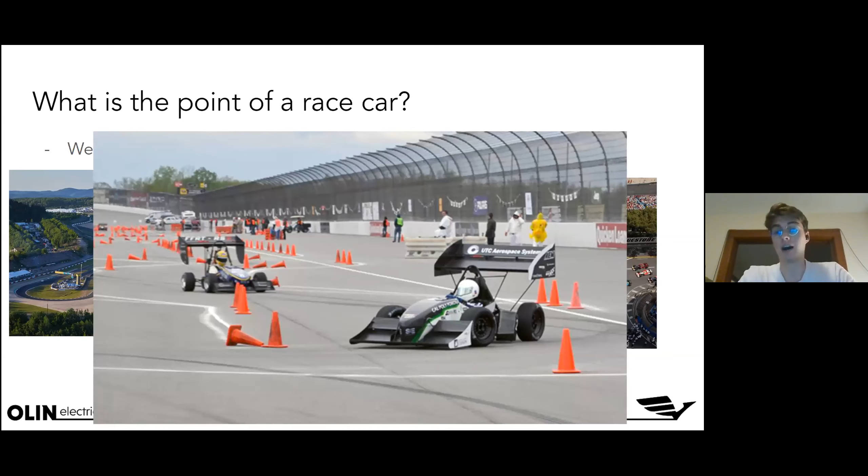And this is especially important for SAE teams because a majority of the points that we can get at competition are from the dynamic driving events. And all of those dynamic events are scored based on your time. So they're all time-based. So what we can talk about more generally is that, yes, we want to go around a track as fast as possible, but really what that means is we want to cover a certain amount of distance in the shortest amount of time. And this is fundamentally the problem that we're trying to solve.

And so the first approach you might have to this is you might say something like what I was just saying. Well, what does that mean? How do we do that? We want to go as fast as possible. But speed and going as fast as possible aren't necessarily the right way to look at this. Top speed, or going as fast as possible as a problem, is really only true if we are measuring the top speed. What we actually want to do is we want to have the highest average speed. So out of the total track distance, we want to cover that distance in the shortest amount of time.

And to accomplish this, what we want to do, and I'm going to put this sentence on the board, and we're going to spend the rest of this presentation dissecting the sentence, is we want to be accelerating as much as possible in the most correct direction at all times.

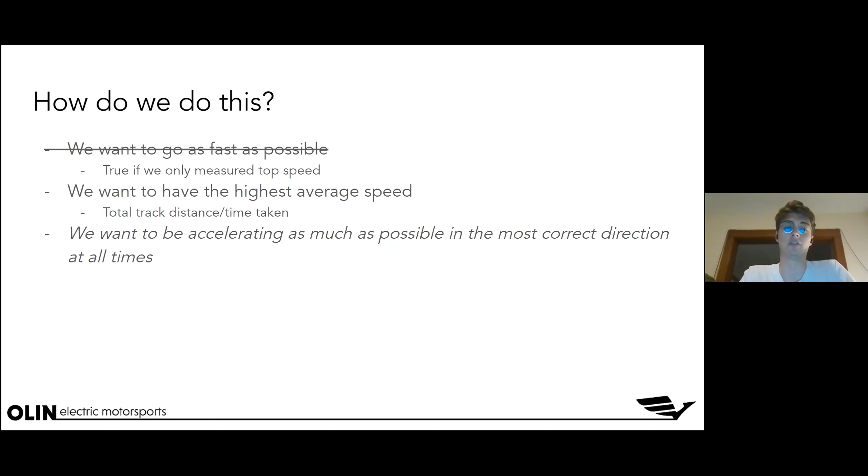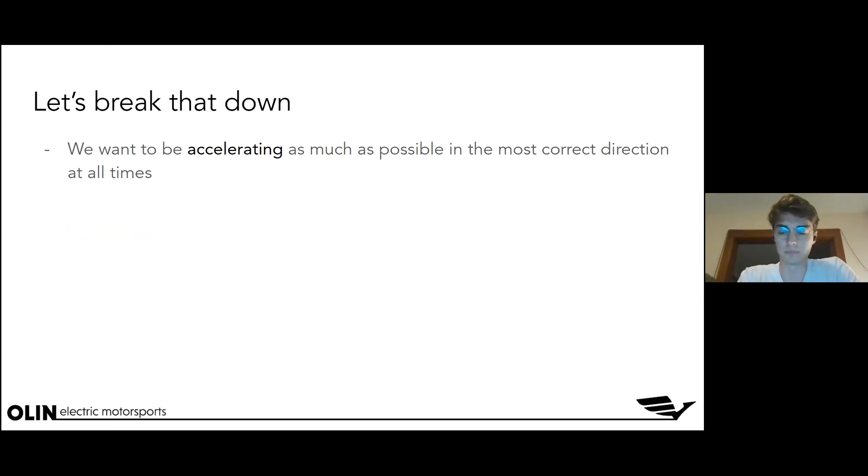So let's break that down a little bit. First, let's talk about acceleration. And why do we actually care about acceleration? So I'm going to give a quick example here. Imagine that we're in our car and we're on some street, we're starting at point A and we're starting from rest, so we're not moving, and we want to go to point B, which is some distance away.

Now, if you were driving your normal car that you drive at home or whatever, the way that you would go about this would look something like this. You'd be starting at rest at point A. You would start accelerating, you press the gas. You'd get up to some speed, probably the speed limit or some speed that you felt comfortable with. You would maintain that constant speed for some amount of time.

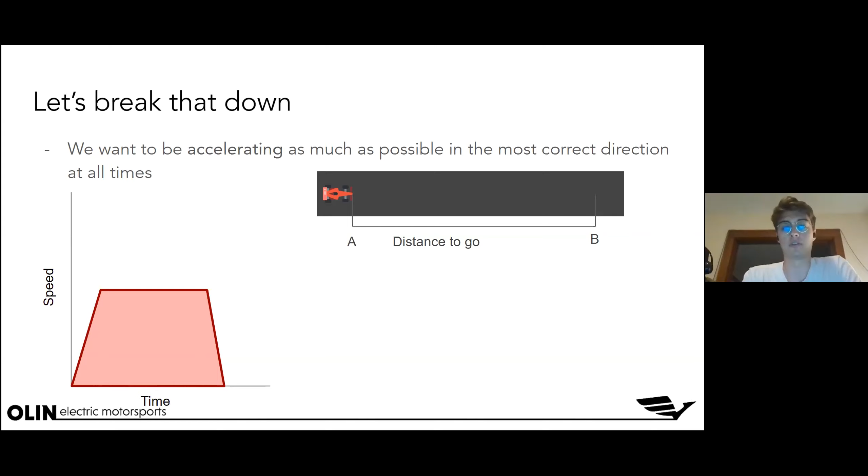And then once you got close to point B, maybe somewhere around here, you would hit the brakes, slow down, decelerate to a stop, and stop at point B. Now, the plot that we're looking at here on the left, sorry, it's kind of covered up, is a speed versus time plot. So speed on the y-axis, time on the x-axis. And an important rule: if we look at the area under the curve, that is representative of the amount of distance that we have traveled.

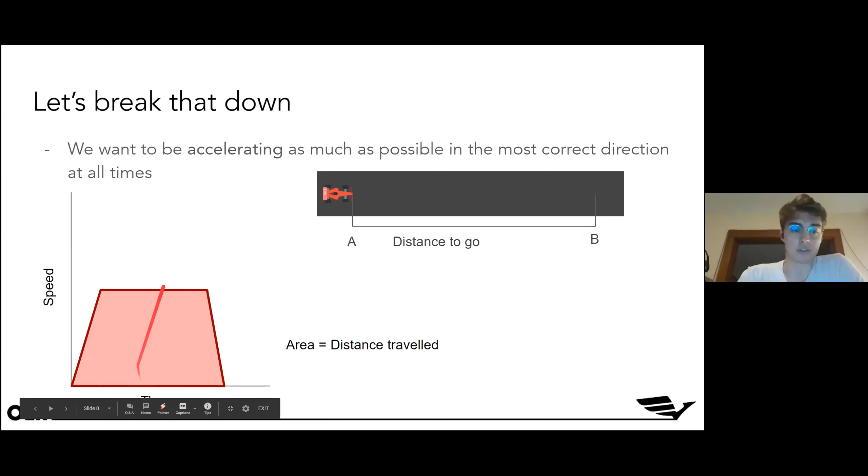So now let's compare what we just did as normal passenger car drivers to what a race car driver might do. A race car driver would do something like this. They'd be starting at rest at point A. They would accelerate, and they would not stop accelerating until they got to the last possible point that they could start braking. They'd slam on the brakes, and they would decelerate all the way back down to rest. Now, again, the area under this curve is the total amount of distance that we've traveled.

And the important thing to take away here is that the two areas under these two curves are equal to one another. But you'll notice that the race car driver accomplished this distance in far less time than us in a normal passenger car. And so the biggest takeaway here is that when you look at a speed versus time plot for a race car, you will never see a flat line.

So what I'm going to show you on the next slide is an example of what a speed versus time plot might look like for a race car driver going around a whole track. You'll see the same thing I was talking about here. On this graph, there are essentially no flat lines. You'll notice that the speed is constantly changing, meaning the driver is constantly accelerating. And that's because, as we just saw, when you are maximizing your accelerations, you will go around the track in less time. That is, we will be increasing our average speed over the course of the track.

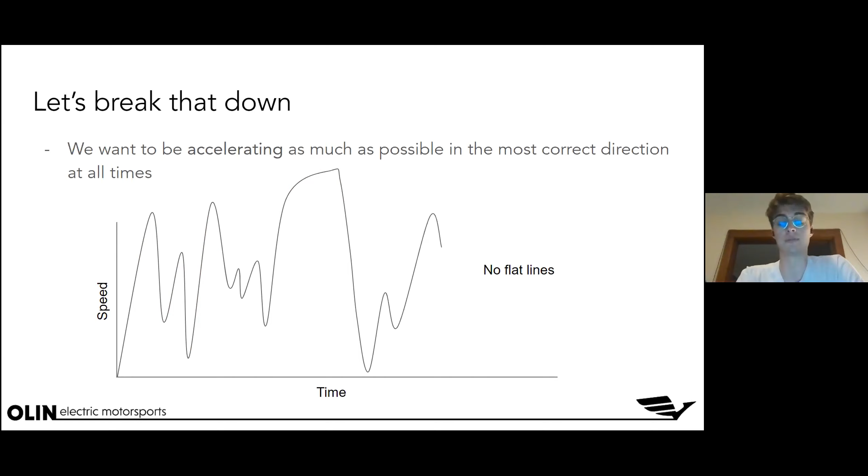The only part that you see begin to flatten out is when we're actually approaching the top speed of the vehicle. So the only time you'll ever see the driver going at anything near constant speed is when they're going as fast as the car can possibly go. And now on the next slide, I'm going to show you a real speed versus time graph coming from two different F1 drivers.

So that'll be our first section to pause for questions. Feel free to put anything in the chat, or if you have something that you feel like you can't type out, feel free just to speak up. I'll wait maybe 30 seconds for people to add some things and then keep going.

I have a quick question. When we're designing the gear ratio, and I guess the car as a whole, how are we balancing for fastest acceleration versus highest top speed?

That's a very good point. So, as with anything, it's kind of a balance. What you really want to look at is the kind of track that we're on and the kind of racing that we're going to be doing. So for a FSAE track, we're essentially never going to reach our top speed. The way that the track is laid out has very limited straightaways and you're almost always turning.

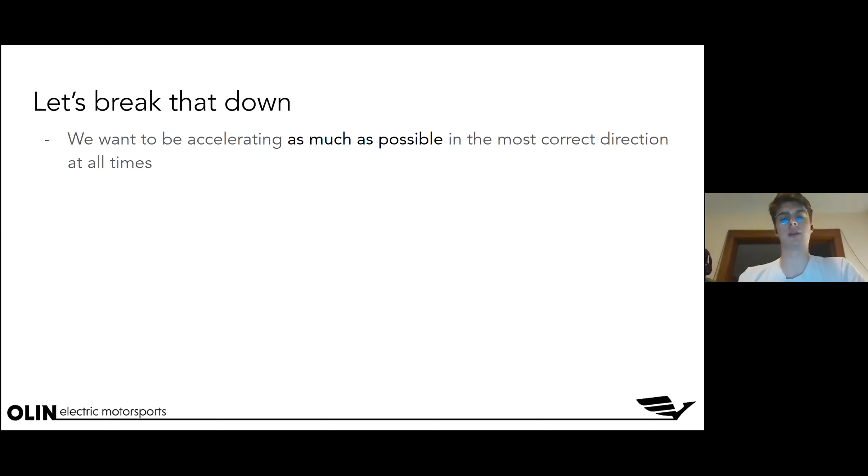Okay. So now let's get to the next part of this sentence, which is this "as much as possible" piece. What does it mean to be accelerating as much as we possibly can? And really the question we need to ask here is, what is limiting us from accelerating as much as possible? And the answer is that basically any vehicle system can theoretically limit how much acceleration is occurring.

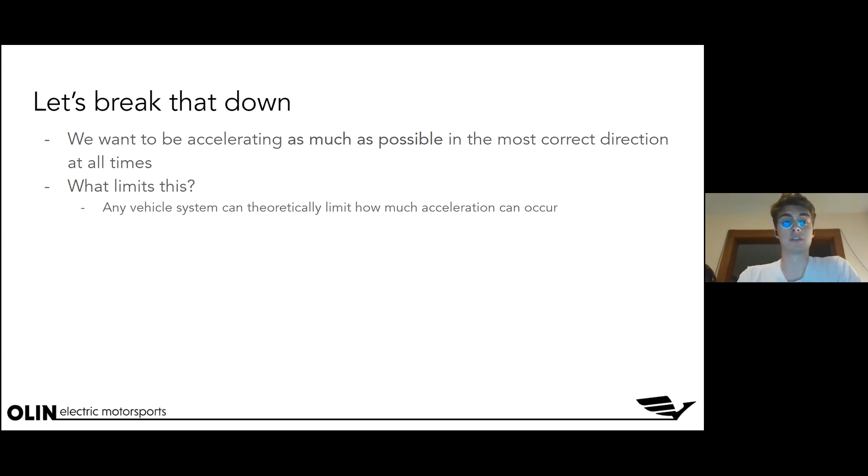So you can imagine if we had a really, really weak motor in our car, we would not be able to accelerate forward very quickly. If our brakes were very weak, we would not be able to brake very quickly. If our accumulator was a couple AA batteries, we'd probably not be able to output very much power and would not go very fast. So any vehicle system can always impact how much acceleration can occur.

But ultimately, every acceleration is limited by our tires and how much force our tires can apply to the road. Because the only way for a vehicle to move is for us to have a reaction force from the road that gets fed through our tires and into our chassis.

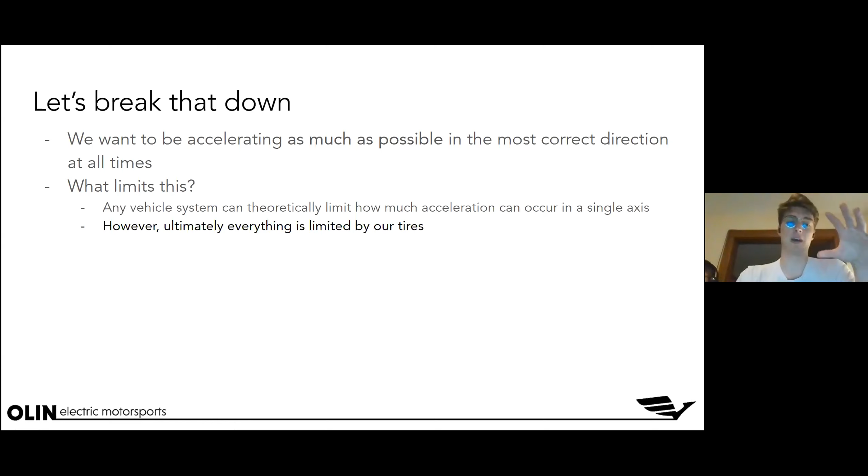You can imagine a situation in which we have the most decked out engine system ever. So imagine we had our car with the Ferrari Formula One engine in it. This thing can output a crazy amount of horsepower. But if our tires were made out of ice, we would not be able to accelerate very quickly. We would just be spinning our wheels. We'd be getting no traction and no forward acceleration.

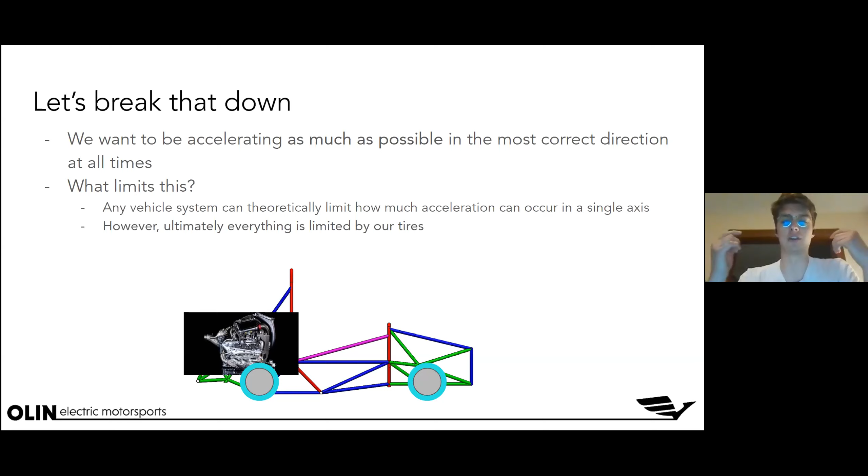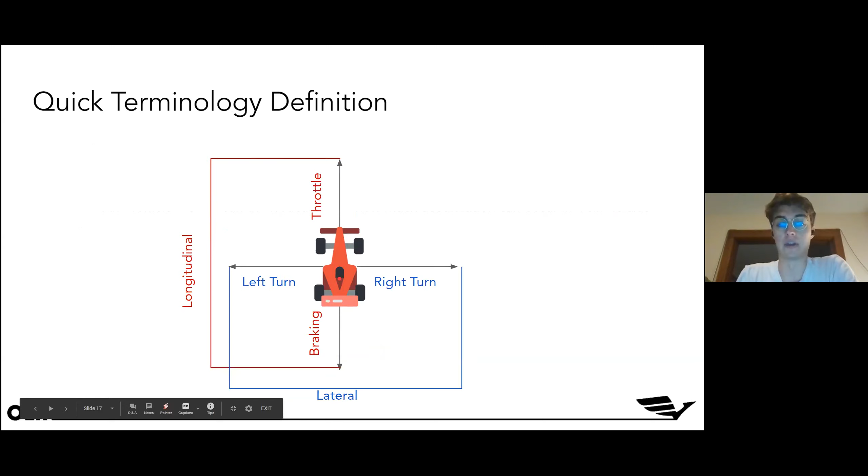So I'm going to pause here for a quick terminology definition, which is just going to make things a little bit easier to explain. I'm going to define two axes of the vehicle. The first one is the longitudinal axis, which defines basically the throttle, so forward acceleration and braking, moving forwards and backwards relative to the car. And then lateral accelerations, which are our left turns and our right turns. So longitudinal means forward and backwards, lateral means left and right.

Okay. So now let's go back to this idea of what's limiting us. It might be useful for us as a team to approach this problem by making a plot that represents our car's theoretical maximum acceleration. So let's build this plot up from scratch. Let's look at our two axes here. The first one is longitudinal acceleration, so how much we can accelerate in the forward and back direction. And the units of this graph are going to be in G's, the gravitational constant for acceleration, which is about 10 meters per second squared.

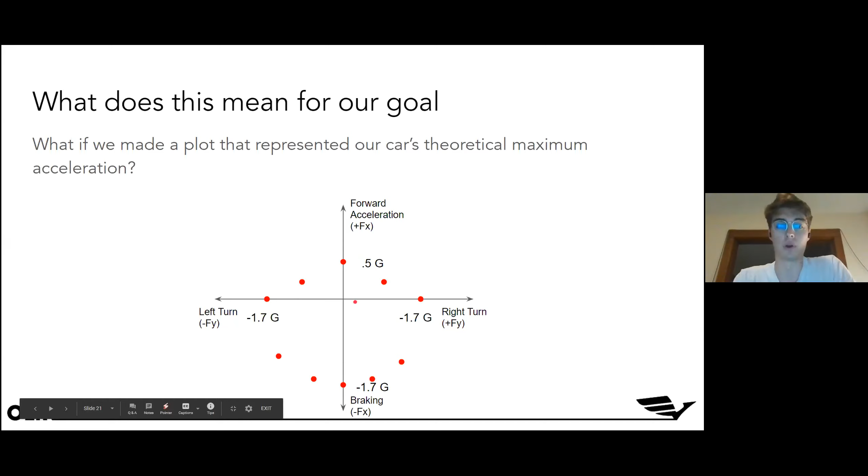It might be useful for us now to start filling in some points in between on this graph. So maybe we have a point where we're both turning right and braking, a point where we're turning right and accelerating, a point where we're turning left and accelerating, and so on and so forth. And you can start to imagine that we might want to make something that basically covers our theoretical maximum acceleration in every direction. And that is what we call a GG diagram.

Sorry, I kind of messed this graphic up.

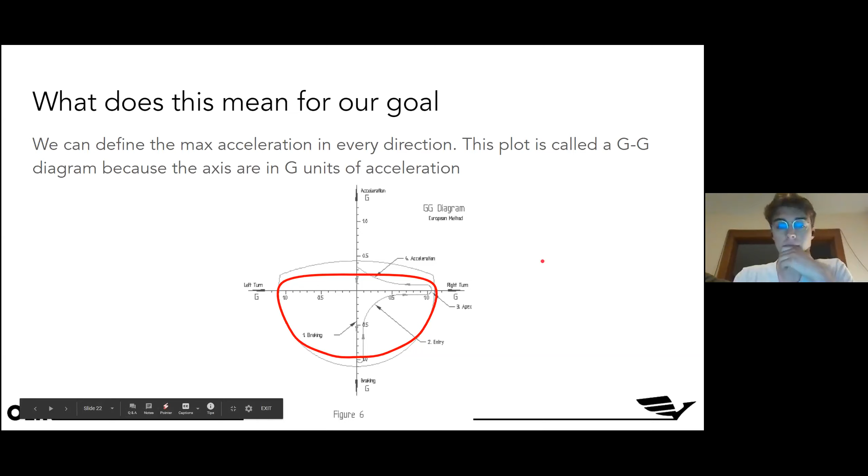So now you can imagine, in this outer region, this GG diagram is limited specifically by our tires. So this makes the assumption that basically every vehicle system can output substantially more force than our tires can output. But if we look at this other example, this little red line, this is what a GG diagram might look like if our vehicle was system limited.

Say our transmission could not output very well, this would limit our acceleration in the forward direction. Or our brakes were really bad, this might limit our deceleration as we're braking. And so basically, ultimately, the point here is that we always want to be tire limited and not system limited.

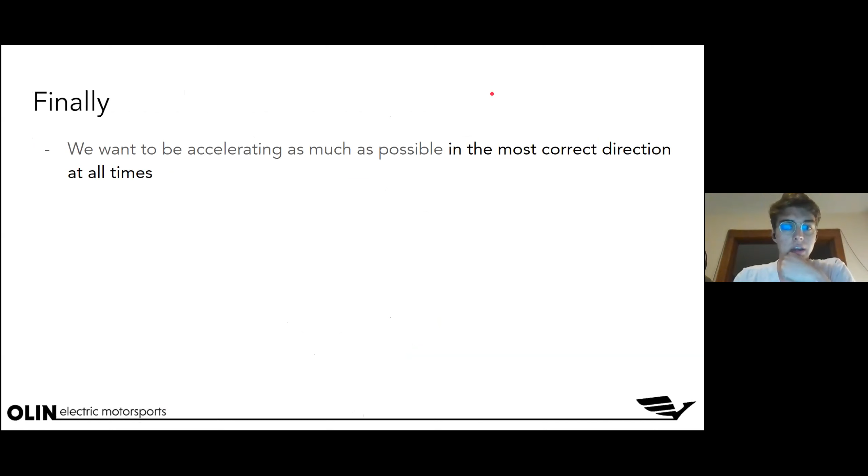Okay. I'm going to pause here again so that we can answer some questions.

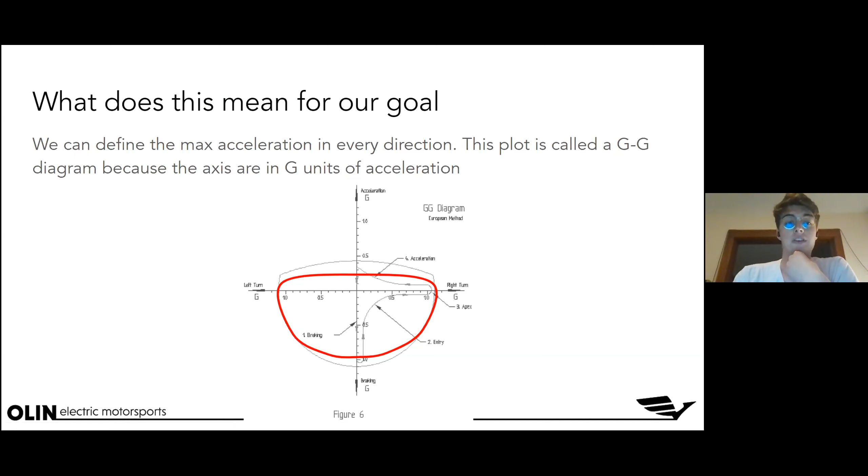How is the GG diagram made or measured? So that's a very good question. There are a lot of different experimental tests that we might want to run that would help us create this diagram. So there's two points. First is through system modeling. So having an understanding of exactly how much force our tires can output, how much power our accumulator can output, how much power our transmission can output, how much power our brake can transmit. And so we can build this diagram through understanding each of our different system parameters. And then the other half is through testing.

So we can always find ways to put an accelerometer on our car and test in very isolated ways to plot out the points that we were making on the diagram, like I was doing earlier, looking at a maximum acceleration case, a maximum braking case, a maximum left and right turn case.

However, if we make the assumption that we are always tire limited and not system limited, we subscribe to a consortium of testing that gives us information for how much total force our tires can generate. And so then the radius of this curve is basically defined exactly from that maximum amount of force.

Okay, we have another question. Is there ever a scenario where the max acceleration is symmetrical vertically? Yes, there is a scenario in that.

So if you can imagine that we had all 4 wheels being driven, so either our power was transmitted to all 4 wheels, or some teams do a thing where they have what are called hub motors, where there's a motor actually mounted to each individual wheel, such that each wheel was being driven and we were getting the benefit of all 4 tires. And then still assuming that those motors were always strong enough to provide more force than our tires could provide, then this graph would look like just a complete circle and not sort of that tapered off circle.

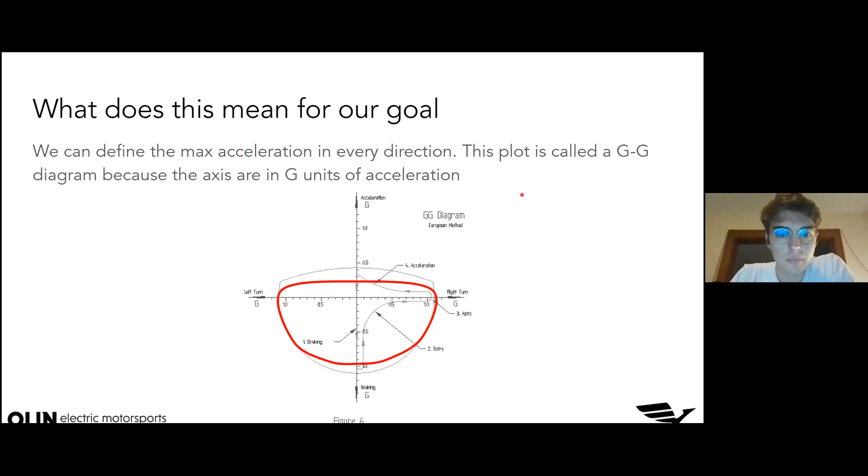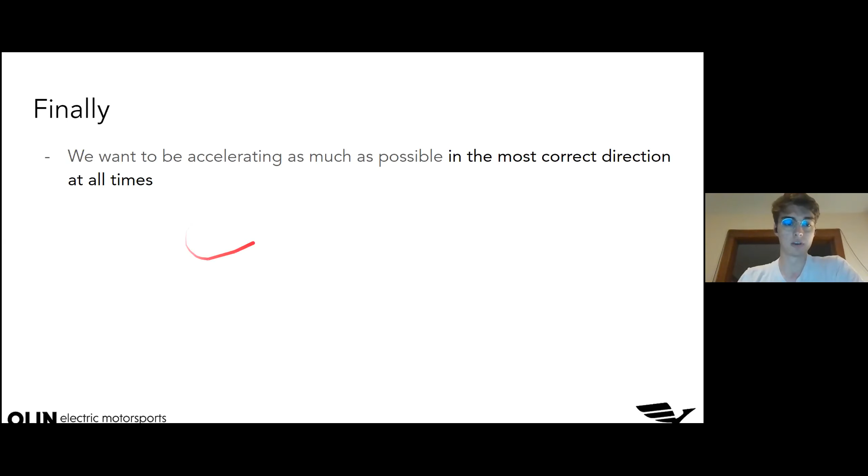So now let's get to this last piece. What does it mean to be accelerating as much as possible in the most correct direction at all times? As I was just saying, we see a lot of different cases and a lot of different acceleration requirements throughout our race. You can imagine a straightaway where we would want all of our acceleration to be in the forward throttling direction. Or you can imagine a higher radius turn where we still want to be accelerating forward, but we need some amount of lateral acceleration to make that turn.

You can also imagine that we might be entering a really tight hairpin turn at a high speed. So we want to decelerate as much as we possibly could going into that corner, but then have a little bit of lateral acceleration so that we can actually begin to enter that corner. Once we're in the corner itself, we want a very high amount of lateral acceleration. But as we exit, we want to transfer into longitudinal acceleration forwards. So as we're going around a racetrack and experiencing all these different turns, we would want to be hitting all these different acceleration requirements. And so what does this mean for our overarching goal?

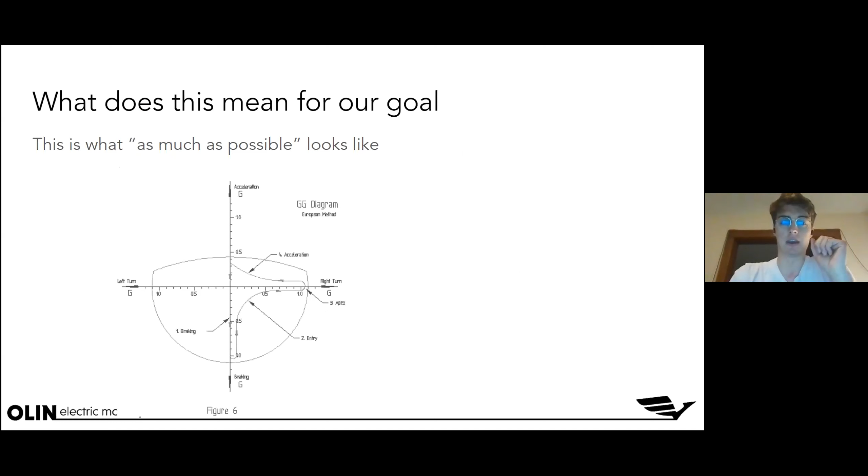And so the GG diagram is an extremely useful tool for a racing team, because it basically allows them to see how well the driver is handling the vehicle that they have and how well the driver is pushing the vehicle to its maximum performance limit.

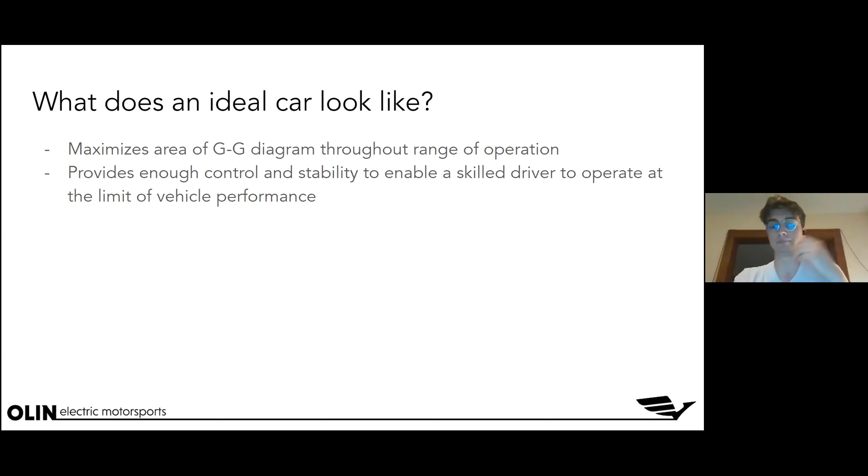You can imagine if you had an amazing car, but it was impossible to control. Say you could still accelerate a ton in all different directions. If it was impossible to control, a driver would never be able to push it to its limit. So I'll leave with a small quote here. Historically, every major innovation in race car design has resulted in extensions of these GG acceleration boundaries and an exploitation of them through improved control or driving technique.

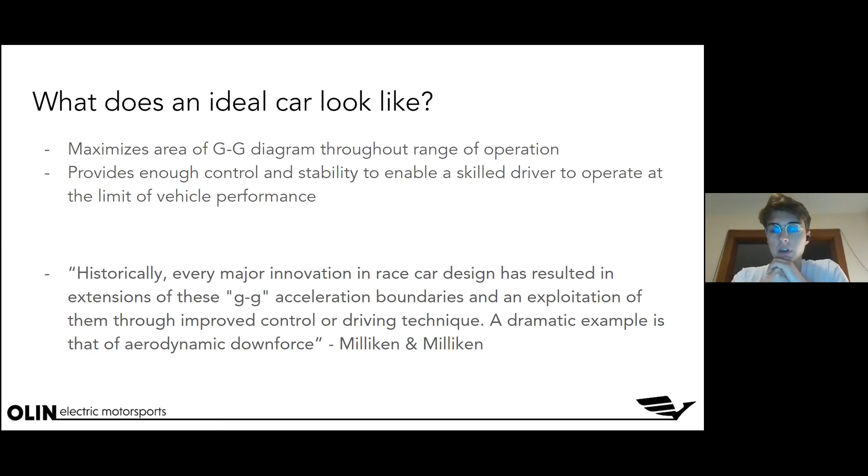So now I'll end with a little video here. You might want to mute your audio. I don't know how loud it's going to be. But this is one of Michigan's teams doing a lap around, I don't know where this lap is taken. But if you look on the left side here of the video, you'll see an actual live GG diagram plotted as the driver goes around the track.

Oh, geez. All right, here we go.

One quick note I will make here is that if you're a keen observer, you'll have noticed that all of the accelerations are actually the opposite of how I had plotted them on the diagram before. That's because the accelerometer is measuring inertial accelerations. And so it's measuring the reaction force that it's experiencing as opposed to how much the vehicle is accelerating in a global frame. And you can kind of intuit this. You can imagine if you turn a car really hard to the right, you'll get thrown to the left. The same thing is being measured by the accelerometer unit.

So hopefully that gives you a little mental picture of what the car is actually doing. I will pause for a quick look at the chat for some questions again. All right, from Lucky: what happens when you exceed the limit of the GG diagram, such as the driver did on the left side? That is a good question. So you'll notice here on this left-hand side, the driver has exceeded what we'd expect the maximum vehicle performance to be. There's a couple explanations for this. One is that, again, these are all system models, and not all the models are perfect.

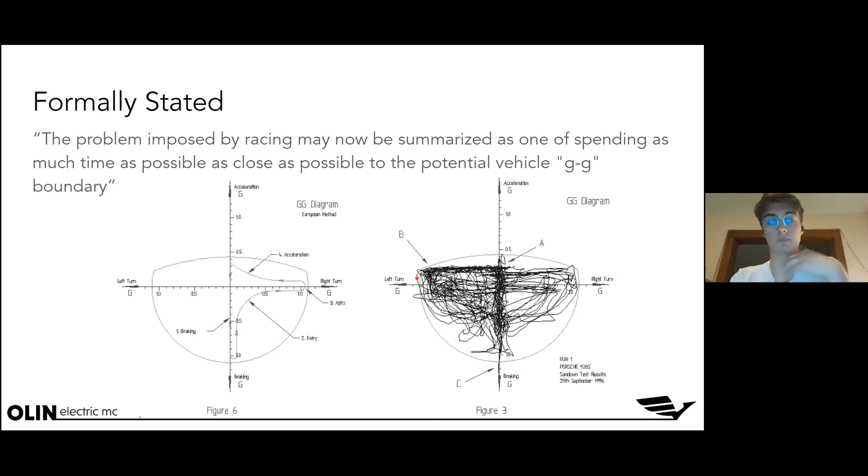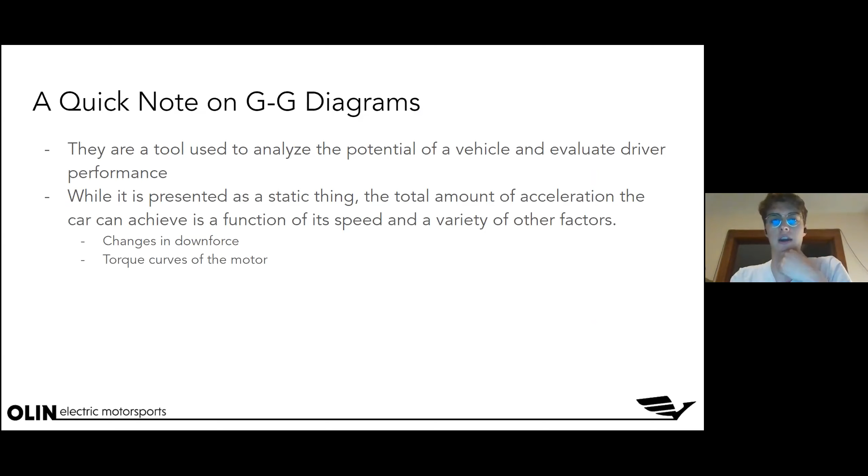Cool. And that actually takes us nicely into my final point, which is a quick note on the GG diagrams. So like I said, they're a really useful tool to analyze the potential of the vehicle and evaluate our driver's performance. But they are not an end-all be-all, and they are not a complete descriptor of the vehicle performance. And this is because a lot of things can change how well your tires are performing.

And so the GG diagram and its boundary is actually also a function of the speed that you're driving at. So if any of you watch F1 or know what aerodynamic downforce is, you'll know that the faster you go, the harder your vehicle gets pushed down into the ground, and that will change how much force your tires can generate. So sometimes we actually look at GG diagrams with a third axis as speed, and that creates this manifold or envelope that looks at how well your car performs over a range of speeds.

So it's definitely okay to look at it in a static case, especially for a team like us where we don't have as much of that aerodynamic downforce. And it's also useful to understand the average that your car will be operating at and understanding its maximum in that sense. But like I said, it's not an end-all be-all, and it's just another tool that we use to look at our vehicle's performance.

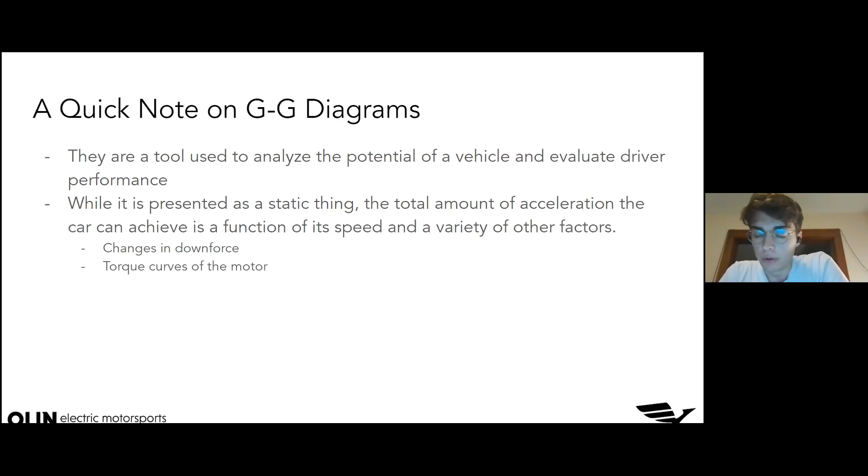From Lucky Jordan, who's the most boomer on the team? Lucky, to your point, I'd say it's you because you couldn't figure out how to use Zoom to get the poll working.

To Kay's point, how do we choose what tires to use? That's a very good question. So here's what we do. The honest answer for our team is that we basically look at one website, which is Hoosier, because they make tires that are specific to FSAE students. And we use that tire testing data that I was talking about before that we basically buy. And that tire testing data allows us to see how much force those tires can produce, at what speeds, and how much steering input it takes to get to those forces.

And so that's part of the decisions that the suspension and chassis team makes, along with some other high-level vehicle decisions, to decide which tire we want to use based on how much force it can produce and how often we expect to be in a situation where we can produce that much force with that tire. And so by looking at all this data, we narrow down to a tire that we think is most suited to the track our vehicle will be on, our vehicle's weight, our power requirements and things like that. And that's how we pick the tire.

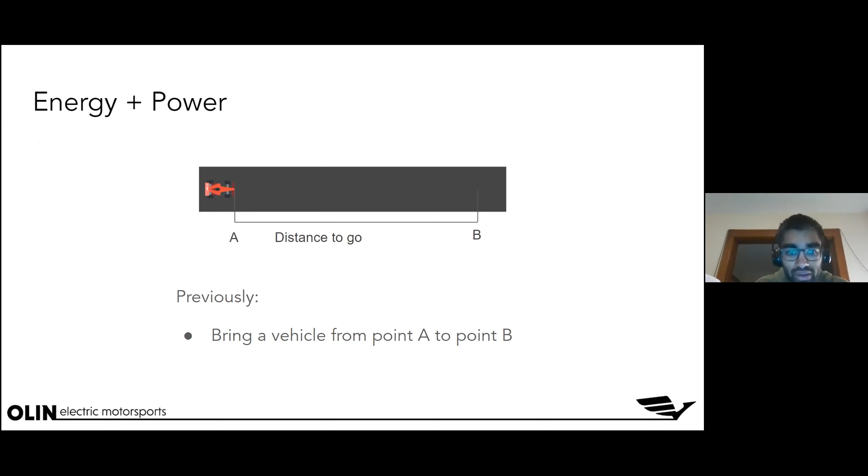Okay, so this is the graph that Nate brought us up with, point A to point B. And we started with two different methods of reaching that goal, each with a different amount of time and each with different amounts of acceleration. And Nate told us this mantra: we want to be accelerating as much as possible to achieve the shortest time.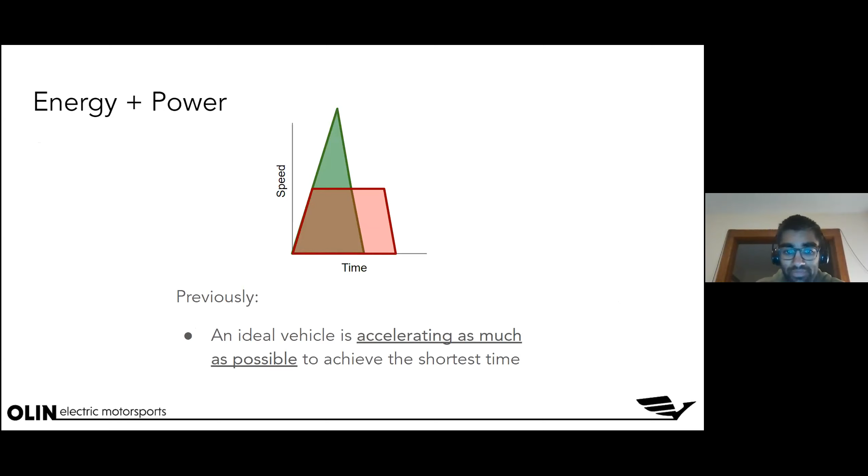So I'm going to introduce two quantities. Hopefully they're familiar. The first is kinetic energy. It has units of joules. It's calculated with 1/2 mv squared. And then the second quantity is power, which is the rate of change of energy. So energy per second, joules per second, is the unit of watts. And these two equations and these two quantities are what we're going to use for most of the rest of this presentation.

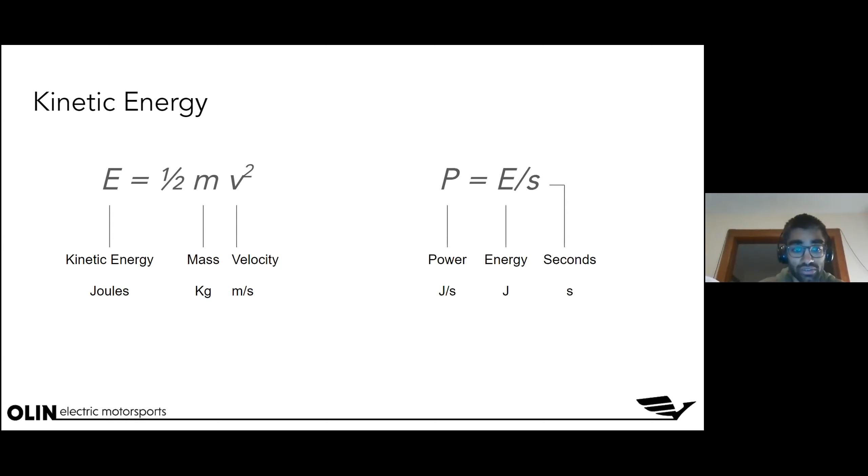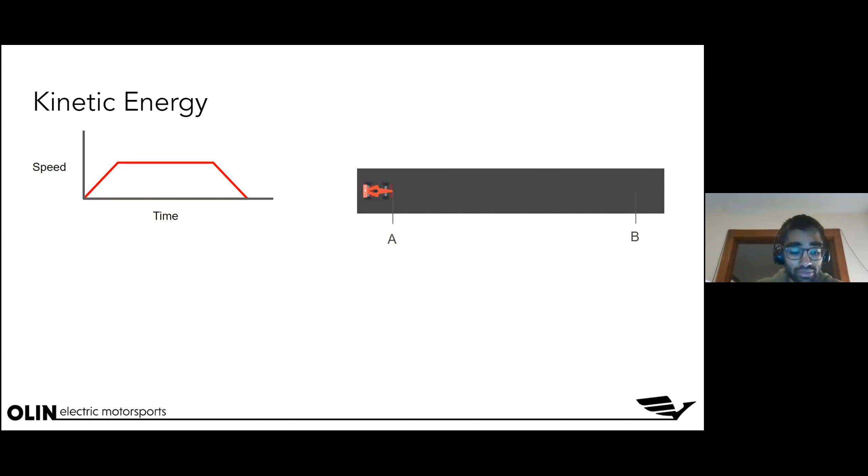So we're going to look at the same example that Nate had. Your vehicle gets up to a speed, coasts for a bit, and then decelerates down back to point B. And for the sake of this example, we're going to contrive this scenario where our top speed, or the reason we stop accelerating, is limited by a very, very tiny battery. All the energy in the battery is going to turn into kinetic energy. So the battery energy is equal to 1/2 mv squared. And that speed is what's going to limit us.

So if you look at the kinetic energy graph, our kinetic energy is increasing, our speed is increasing, but then once we reach the total battery energy, we're going to stop accelerating. If we look at this from a power point of view, power is the derivative of kinetic energy. Our power is increasing and increasing until we've used up all of our energy, and it goes to 0. So in that first section, we're accelerating. The vehicle is using energy to accelerate and move.

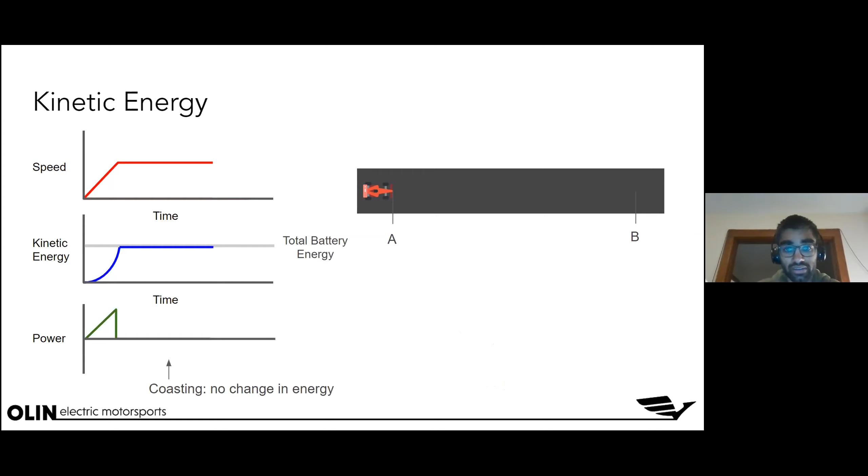In the second section, the vehicle is coasting. So energy is constant, it's not changing. You're not on the throttle, you're not on the brakes. And in the last section, the speed is decreasing, the kinetic energy is decreasing. So power is negative, and we are braking. We are losing energy from the vehicle's motion to heat and to the atmosphere in the form of brakes.

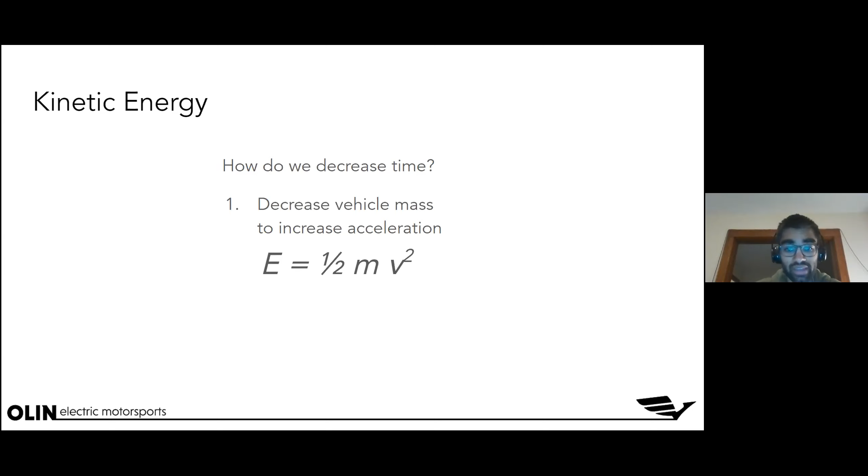So our goal is to decrease this time. And one way we could do that is to decrease the vehicle's mass. So if 1/2 mv squared equals the same thing, we can decrease the mass to increase the speed. So graphically, here's what that looks like. The kinetic energy and the power graphs are going to be basically the same. You're going to use the same amount of energy, and you're going to put it down at the same rate. But because your vehicle is lighter, you accelerate faster, you get to a higher top speed, and you decelerate faster. So this is important because reducing mass improves your acceleration, it improves your braking, it improves your turning, it improves acceleration in every direction.

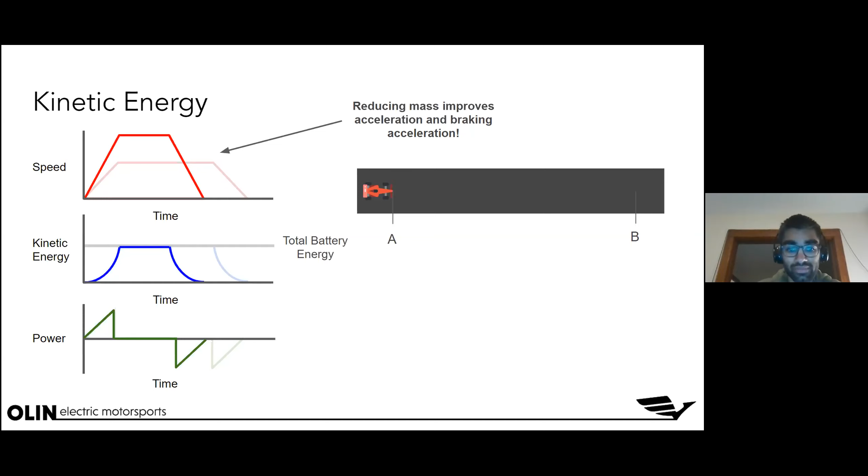A second way we could decrease time is we can increase the power. We can put down that energy faster, and that'll increase our acceleration with the amount of energy that we have. So graphically, this is kind of what it looks like. The kinetic energy reaches the same level, but it gets there way faster. And to do that, you might need to put down way more power, and you reach the same top speed, but you get there faster. So as Nate was saying, the area under the curve is the same, but you do it in less time.

So you can imagine this as upgrading your motor, being able to put down more power so that instead of being system limited by your powertrain, now you're going back to being tire limited because you're accelerating at the tire's peak instead of at your motor's peak. You'll notice that this doesn't affect how quickly you decelerate because we only made an upgrade to the powertrain.

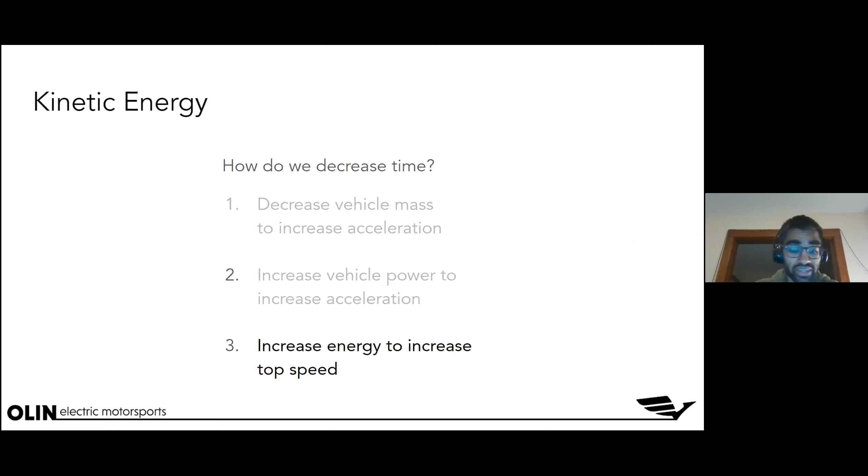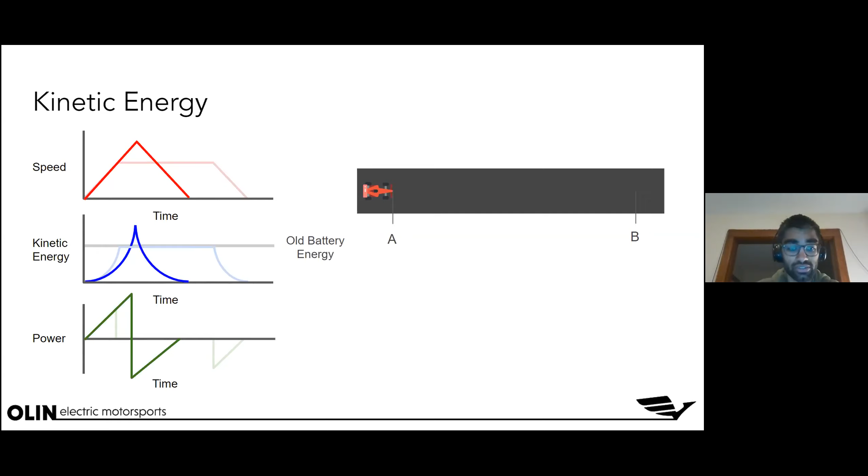So then a third example is we can increase the amount of energy we use. We get a bigger battery to increase our top speed. So you can see in the kinetic energy graph, we've exceeded what the previous cap was. In the speed graph, we're increasing speed at the same rate, so we're accelerating at the same rate, but now we reach a higher top speed. And this is the same shape of the graph that Nate had. Our power by extension is also increasing, but you can see the vehicle is constantly putting down power to accelerate or constantly taking away power to brake. And this results in a faster lap time.

So some takeaways I hope you can get out of that section: one, reducing weight increases acceleration, and it does in every single direction. It takes no hardware upgrades, and you get higher performance. Two, outputting more power will increase your acceleration. And three, increasing the amount of energy consumed will increase your top speed. So using more energy is good, putting down more power is good, and reducing weight is good.

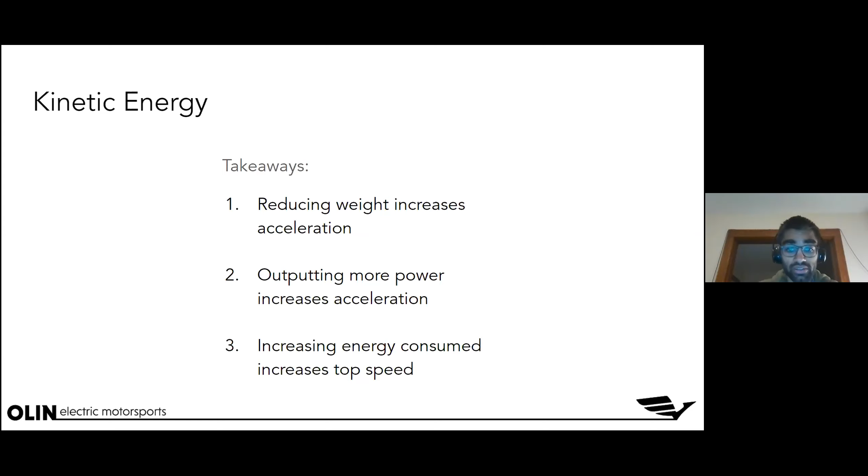So why do we care about power and why do we care about energy? So the first thing is optimizing our vehicle's weight is extremely valuable. Every single person is designing something on this car, and every amount of weight that each part has is critical to getting this done. If we can reduce our vehicle's mass by 2%, that's huge, because the difference in time between first and second place in these events is down to the tenths and hundredths of seconds, and that's how you win.

So 2, the rules define our peak power. So if you only have a peak power you can reach, then doing so in the most efficient way and with the least amount of weight means you can drive the fastest. And then 3rd, if you're consuming more energy to go faster, that means your battery pack has to store more energy, and you can't do that for free. So there's 3 costs associated with storing more energy.

The first is the dollars per joule, and batteries are expensive. And the second is the weight or mass per joule. Batteries are really, really heavy and take up almost 25% of our vehicle's weight. And then the last is there's a volume per amount of energy stored, and our battery pack is huge and a huge challenge. So all 3 of these concerns are some of the biggest challenges for our team, and they're some of the biggest challenges for any electric vehicle manufacturer.

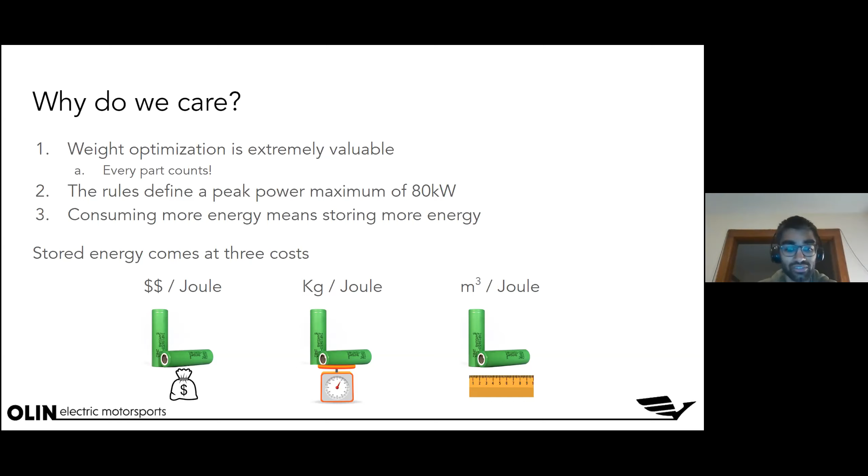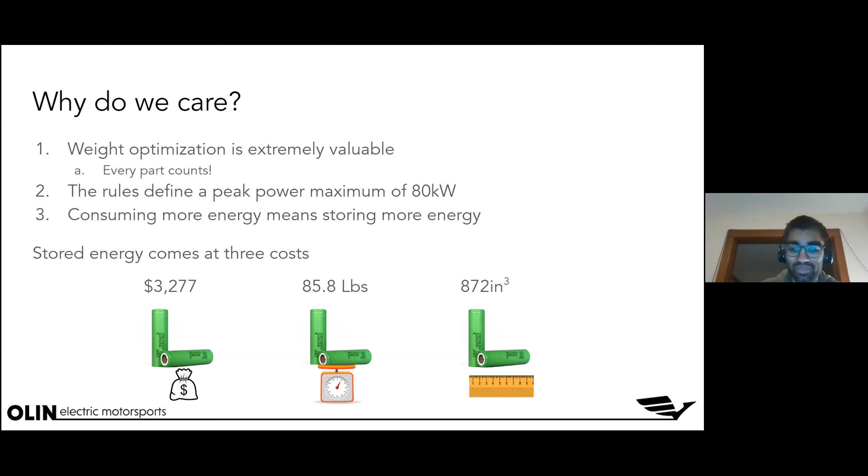So for context, some of these numbers: over $3,000 in pure battery cost, 85 pounds of just battery weight, and almost 900 inches cubed of batteries, assuming they're packed perfectly efficiently.

So now we're going to talk about efficiency. And first we're going to talk about what that means. So all the energy that you put into your system must leave. At point A, you have no kinetic energy. At point B, you have 0 kinetic energy. So all the energy you put in has to be going towards your goal, towards useful work, or it's going to be wasted or lost. And we assume that nothing was wasted or lost in our previous example, but that's not true. And it's really important that that's not true in real life, and we're going to analyze that.

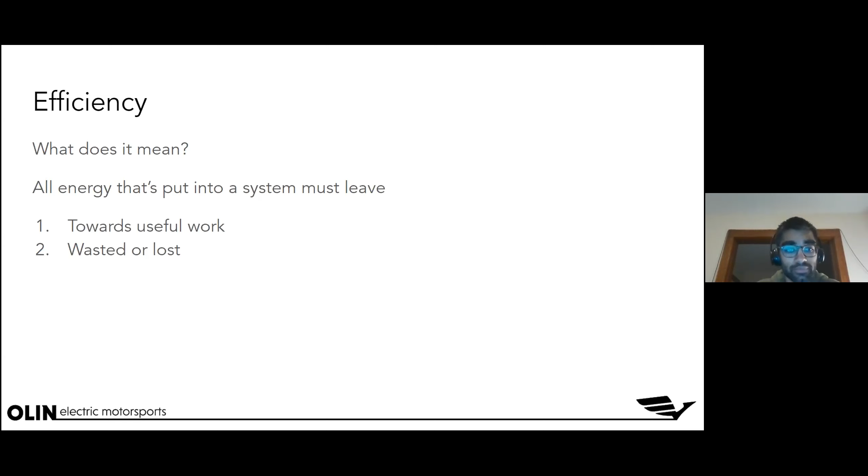So how are some ways that energy is lost? Well, if you went to the teaching session last week, Adi talked all about buck converters and power conversion, and how the way you design those systems can have different efficiencies. Some other common ways are electrical resistance in terms of components, in energy conversion, in wires, in bolted joints of our bus bars. These are all things that we make decisions on, and all impact how much power is lost through electrical processes.

Second, for a more mechanical perspective, there's resistance to mechanical motion through friction, through rolling resistance in our tires and bearings, and due to the force of aerodynamic drag. And all of these things will slow you down unless you're putting down power and using energy to accelerate and to fight these forces.

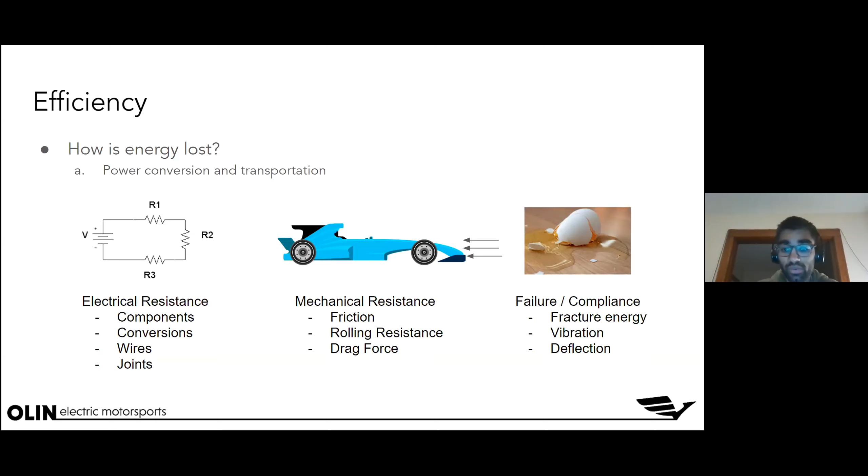And then the last one is the idea that if your thing is breaking, or if it's bending or deflecting in a way that's not useful for what you're accomplishing, you're going to lose energy to do that. For example, if you push a beach ball, you're going to lose some energy into deflecting it, into squishing it, as opposed to just rolling it as far or as fast as possible.

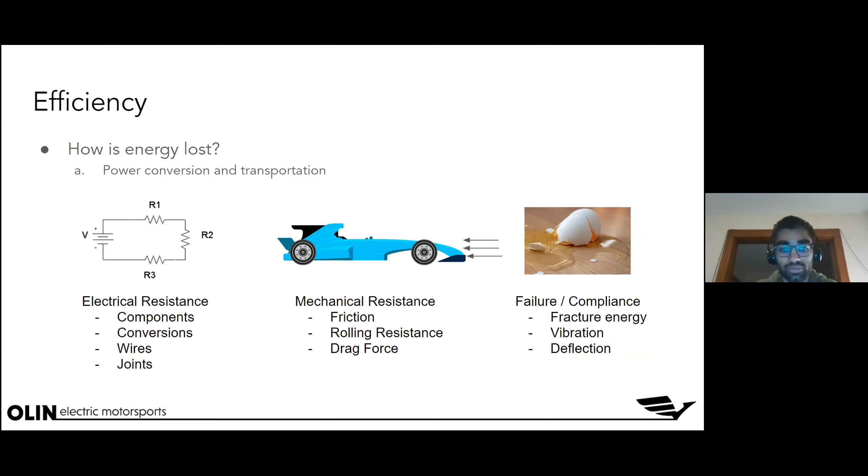So now on the formula car, let's start with the accumulator. The important part is that the 80 kilowatt rule is measured at the accumulator, and it's measured actually by the competition judges. And if you exceed it, you're immediately disqualified. So let's say its efficiency is 95%. We're transferring energy, DC power, to the motor controller. And after a 95% efficiency to the motor controller, we're at 76 kilowatts.

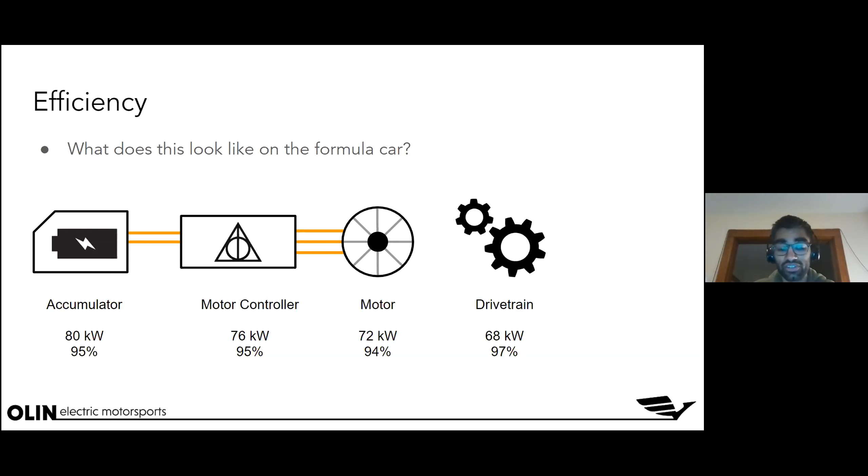Through some black magic energy conversion in the motor controller, that's 95% efficient, we're going to the motor. The motor gets in 72 kilowatts and is 94% efficient. Then we have the drivetrain, which we're going to call 97% efficient. And after all of those conversions and all of those lacks of efficiency, we finally get to the tires. And the tires are only getting 66 kilowatts, which is 80% of our total power, whereas the accumulator, where we're being measured, has 80 kilowatts.

And every step in between is something we can design, we can choose, we can make decisions about, and making sure that the process from the accumulator to the tires is the most efficient way possible is super, super critical for making sure we have the fastest car, because the more power you can put down to the road, the more you can accelerate.

In hindsight, I realize I have not stopped at all, so I will stop now. And I can scroll back any number of slides and answer any questions. Feel free to jump in over voice or in the chat.

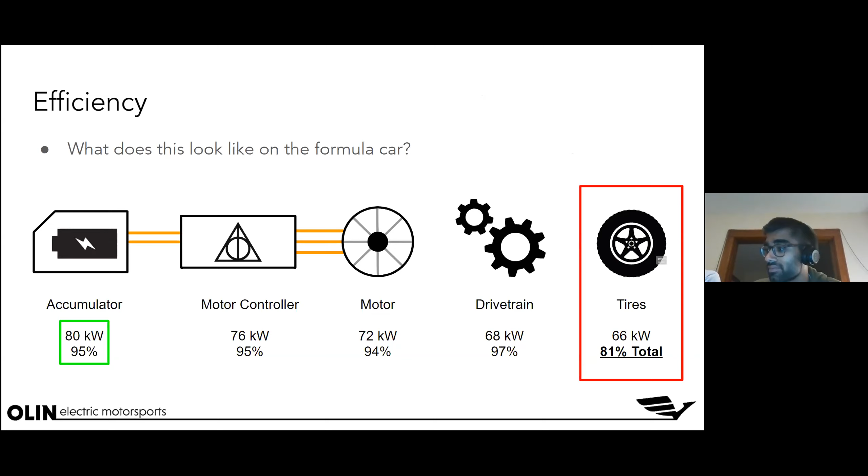So you said that you could increase power consumption. How would you do that? I'm confused. So different components have max power outputs. So we make sure that the motor is rated to a certain amount of power. The motor controller is rated to a certain amount of power. And if any of those are below the maximum power we can achieve, then that's going to limit us from accelerating as fast as possible.

Another thing in that vein is just how good the driver is responding and controlling the car. You can think of the rate at which you're increasing your acceleration has something to do with the driver actually physically pushing the pedal and feeling comfortable and knowing the car well and being a good driver. And that's another reason that that power graph might be steeper or more shallow.

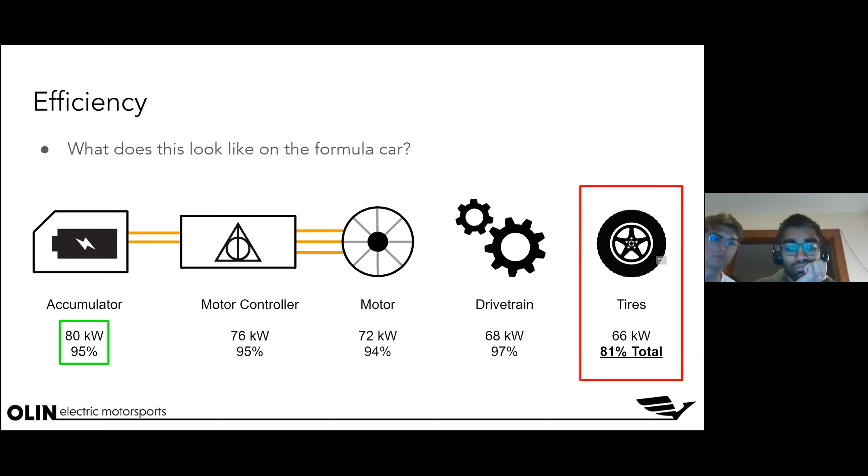I would imagine at some point, if the car doesn't weigh enough, you lose a lot from having a low downforce on the tires, right? Is there a number for that, or is that something we don't really even consider because the car weighs plenty? That's not exactly a problem that occurs with tires, because you provide more lateral force as you have more normal force on the tires because your tires are applying load through friction. However, a fundamental problem with tires is that the more load you put on them, you actually gain friction force at a decreasing rate.

So you almost always want to have a lighter car, because even though yes, you're getting more total amount of force, it's still in a beneficial ratio as opposed to becoming a heavier car and having more normal force on the tires. So it isn't really a case in which a car could be too light, except for the case of if you were really thinking about top speed and not having enough momentum to fight things like drag. But from a tires perspective, it's almost always useful to be lighter.

How much does the weight of the tire itself play into all of this? What exactly do you mean? What's the trade-off of having a really heavy tire and rim or having a really light tire and rim? Is that independent from the weight of the chassis? You can imagine another way of measuring kinetic energy. So we were looking at translational energy, but there's also rotational energy. And really you should be adding those two together when you're looking at the vehicle accelerating. So the faster you have to spin, or the heavier the thing you have to spin is, the more rotational inertia it has, the more energy it takes to move at a higher speed.

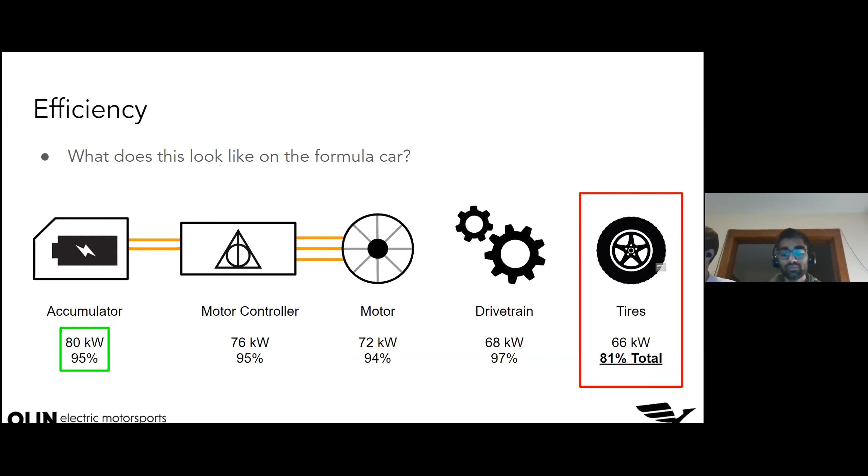And you don't really think of sound as a way that energy leaves the system, but the more that the chain is rattling, the more that all the components around it are vibrating, the more friction that you get between each individual link, the more energy we're losing from the system. So theoretically, if you minimized the length of your chain and the gauge of your chain, it would lose less energy than a longer chain of higher gauge.

And also, every time you transfer energy from one system to another, you also lose a certain percentage of it. And so the fewer steps between the motor and the wheels as possible is best, which is part of why teams go with hub motors. It's more complex than that, but that's part of the reason.

James, what was your question? Is something we model and test? Or Audie's question? I was answering Audie's question. Oh, gotcha.

There's been a lot of shit posting in the chat. If I missed your question, please repeat it either verbally or at the end of the chat. Okay, cool. I just have one or two more slides.

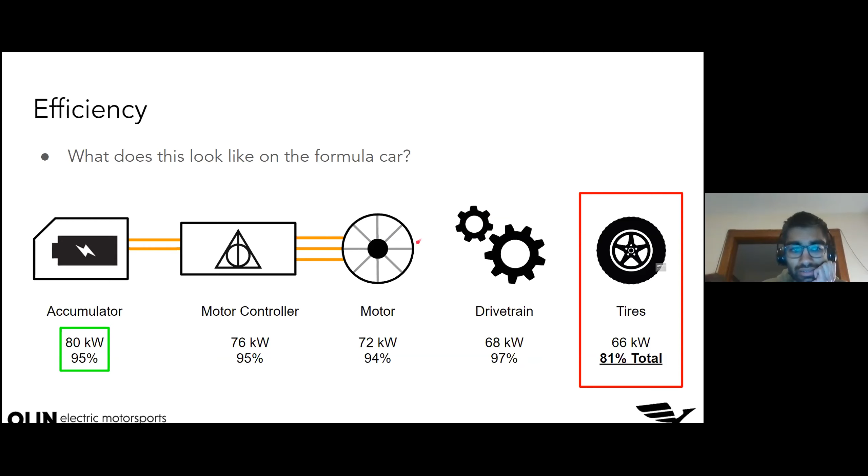So our takeaways from this section is if our vehicle is limited in power and it's measured at the battery pack, then the most efficient vehicle possible can use the most amount of that power for accelerating the vehicle and ultimately maximizing our acceleration. And almost all those components in between the accumulator and the tires are something we either choose or design. We have lots of control there, especially on the accumulator side of things. And that's something that can really differentiate teams at competition.

So another angle to look at this is power transmission and energy storage from a renewable energy standpoint, because it's a lot of the same concepts, but applied to a larger scale. And this might help you answer questions about why we can or can't use certain renewable energy strategies. If someone asks you, why can't we stick a giant solar panel right in the middle of the Arizona desert and power the entire country? Well, you're going to lose energy as you transmit that over different distances, and massive distances will introduce large power losses.

So if you can think of these concepts more globally than just an electric vehicle, but about powering your home, storing energy and transporting energy, I think it's a really powerful framework for understanding way more systems and way more types of problems than just an electric vehicle.

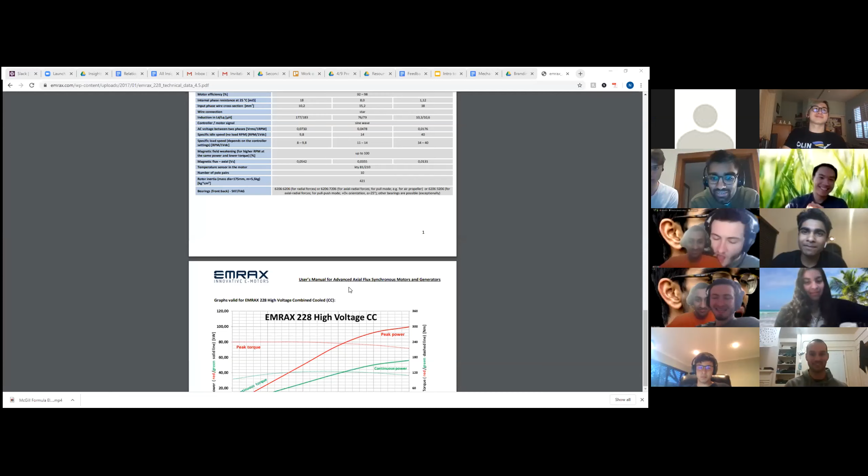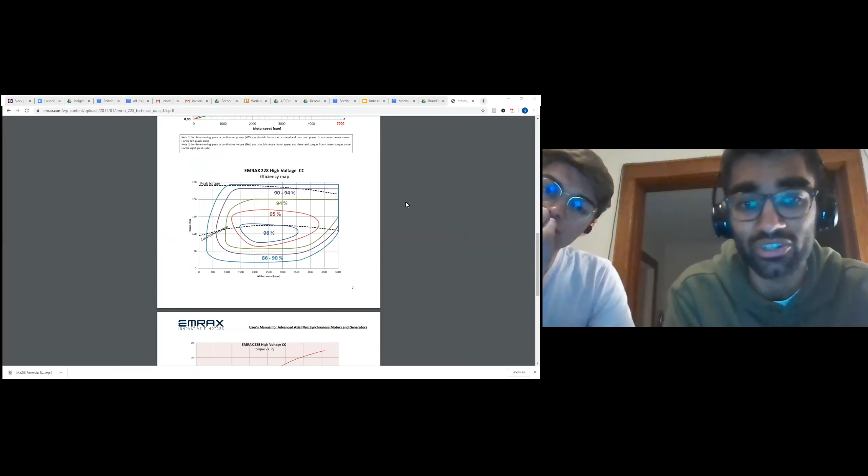So this is a really cool graph that is on the data sheet for our motor. And it's a way more accurate description of answering the question, how efficient is our motor? Because it depends on both the speed and the torque that it's putting out. So this graph is a map of those values, which I thought is really freaking cool and way cooler than just a number. And it's true that a lot of our systems have different efficiencies depending on how you use them.

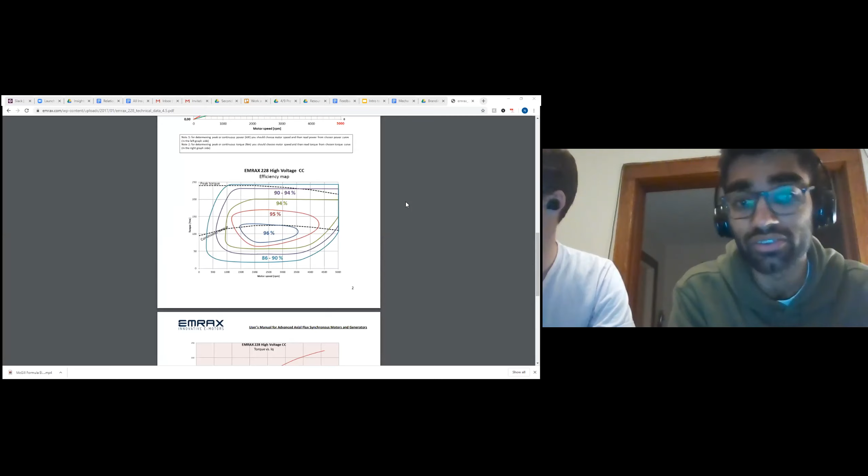If the accumulator is putting out very, very little power, then very little of it is wasted to heating up the batteries and through voltage drops. So efficiency as a number is a really, really incomplete way of describing any system.